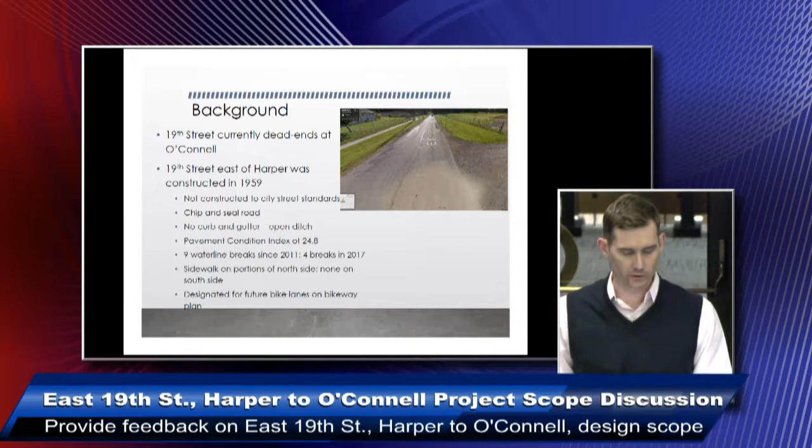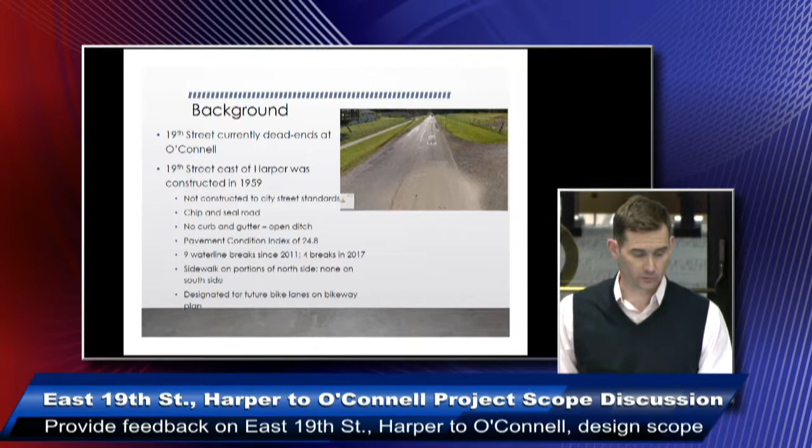Just a little bit about the background of the project. 19th Street between Harper and O'Connell was constructed back in 1959. It was not constructed to city street standards—an old chip seal road. It's in need of reconstruction and improving to city standards. It has a very poor pavement condition index. We've had numerous water line breaks over the years, 4 last year alone, so there's some infrastructure failing out there that we feel needs to be addressed. Some segments have sidewalk along the north side, but none on the south side, so that's something we're looking to improve with this project. It's also on our bikeway plan to have future bike lanes added.

A little bit about the history of the planning and the CIP. We originally began thinking about proceeding with reconstructing the street back in 2014, which ties to the Venture Park project we'll discuss in a minute. Back then we planned on doing design in 2015 and construction in 2016. Since then we've delayed the project and pushed it down the road because it hasn't been as needed as we felt originally, but we're seeing some movement out at Venture Park, and we've now planned this for construction in the CIP for 2019. This was discussed last year when we were putting together the budget and the 5-year CIP plan, and ultimately decided to include it in 2019.

It has a construction cost of about $3.6 million. One thing I'd like to point out early on is we don't have any additional plans to widen 19th Street to the west or do any other projects in the future to increase capacity. The plans are to maintain one lane in each direction for 19th Street.

Jeff's going to talk about Venture Park here in a minute and some of the history of the development.

Back when we were planning Venture Park, we decided that we needed to put in some infrastructure so that it was pad ready for businesses to come in and develop. So we spent $7.5 million out there in 2013 and 2014 doing site grading, putting in streets, water lines, sewer lines.

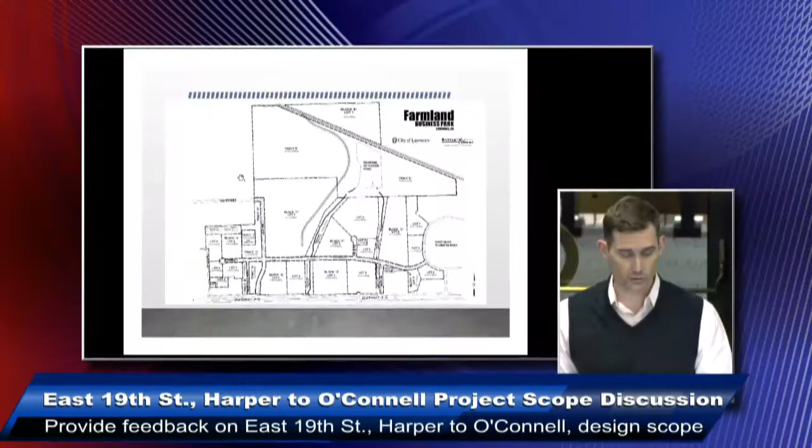The thinking at that time was that we would plan, and this was in 2014 when we finished the project, to redo 19th Street in 2016. At that time, it would be best to make the official connection because the condition of the street was in such poor shape that we felt it would be better to wait until that was improved before the connection was made. So that's a little bit about the history of the infrastructure installed at Venture Park.

One of the things about the planning process for Venture Park was that we looked at providing different access points, and the 19th Street connection would provide safe, efficient access for city residents working out there at Venture Park and at East Hills Business Park as well.

Fast forward to 2018, we finally see some movement going on out there. VanTrust is constructing a spec building with an estimated completion date later this year. We hope that momentum builds and we can bring jobs into the community, which was the original vision of Venture Park.

Another point about the importance of this connection is that it's going to help the marketability of that business park, further enhancing job creation for Lawrence residents as it continues to develop in the future. So when we went through the planning process for the business park, we did a traffic impact study.

It looked at different scenarios at 50% build out and full build out. I'd say it was a pretty conservative estimate. Industrial parks can vary in trip generation, whether it's more warehouse and automated type industrial or more manufacturing that may have more employees and more trips. So there could be some variation, but the trip generation we used was fairly conservative.

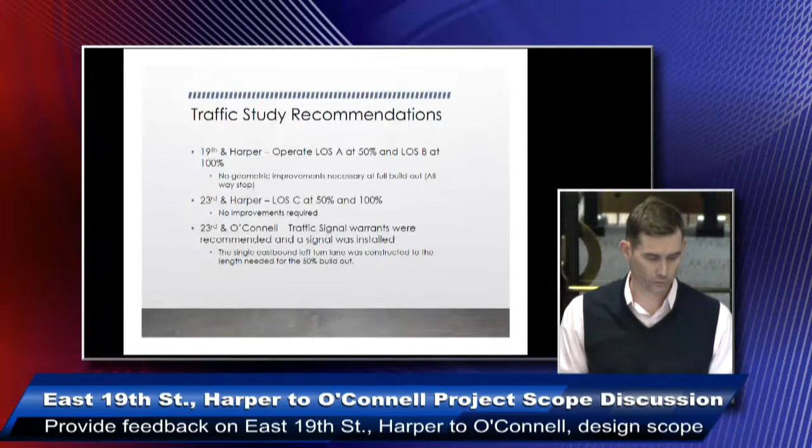And then at 23rd and O'Connell, with the traffic projections, it projected warrants for a traffic signal at that intersection. So when the infrastructure was installed, a traffic signal was installed there, that is really the primary access point to the business park. That was done ahead of time, back when the infrastructure was put in, with that understanding that it would be the primary access point, and turn lanes were put in as well to accommodate that intersection for future traffic.

And now I'm going to turn over to Jeff to go over a little bit of the planning history.

Good evening. Jeff Crick with the City County Planning Office. Just going to go through some of the history that our office has had with this property over its long time here. We actually came to the property all the way back in 2008, before it was even in the city of Lawrence and in the possession of the city of Lawrence itself.

The original Farmland Industries redevelopment plan that was adopted as part of Horizon 2020 was completed in 2008 originally. It was brought into the city of Lawrence via an annexation agreement, and both the county and the city agreed to that agreement in 2009. The city of Lawrence became the owner of the property in 2010, as you can see there.

One of the big things to give you an idea with that one is that in 2008, one of the key infrastructure goals lined out based on the comments we received was to provide a road network through the site that connects to the city's existing road system and connects to East Hills Business Park. So the platting and all the work the city undertook after that was based on the Farmland Industries redevelopment plan and those initial goals approved by the city commission and the county commission.

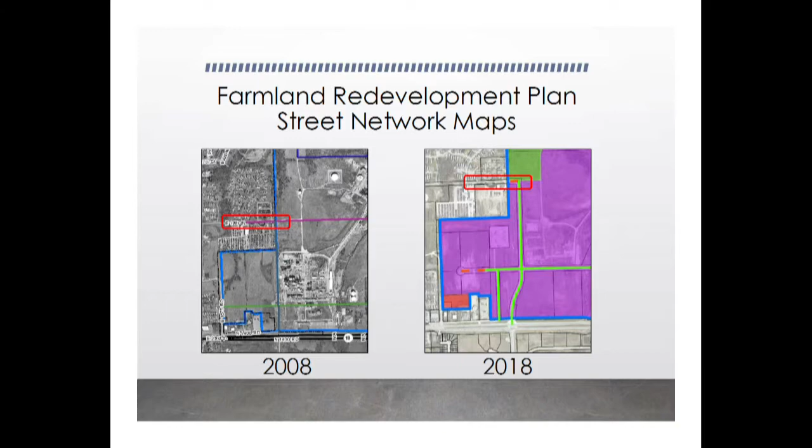But that connection you can see highlighted in the red rectangle is the same connection you can see in 2018 that is highlighted, that follows the plat adopted by the City Commission, showing a connection between O'Connell as it meets up to 19th Street. So just a very brief history on that one.

Plats are required to go before the City Commission in this instance, so the City Commission saw the final plat and accepted the easements and dedications to it, and also the amendment to the comprehensive plan was required to go before the City Commission, and it was also adopted at that time. I'll hand this over to Jessica, but I'd be glad to answer any questions you have in a little while.

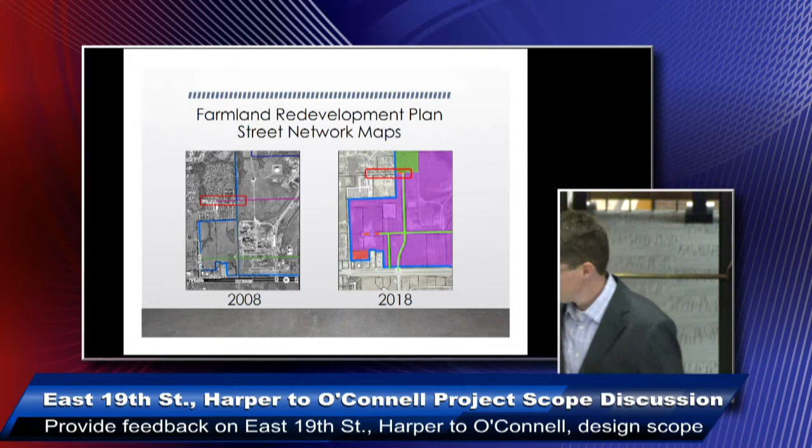One of the responsibilities we have with the Lawrence Douglas County Metropolitan Planning Organization is establishing and adopting regional long-range transportation plans for the region. Looking back at the history of 19th Street connecting to O'Connell or Franklin, it's been in plans for over 20 years to connect as part of our roadway network. I don't have evidence of plans past 2020, but it could exist from before since it was annexed into the city. Over those years it's been identified in plans showing a connection to either O'Connell or even further east to Franklin Road.

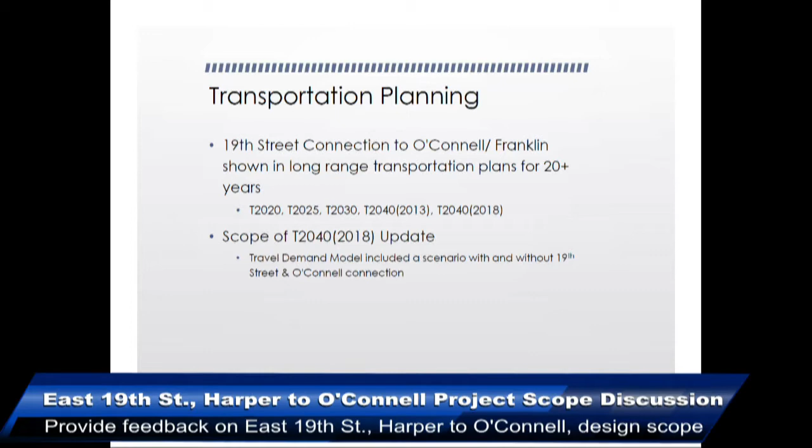During the scope of our last transportation plan update called T2040, we developed a travel demand model for that plan update, and that included a scenario both with and without a connection at 19th Street at O'Connell, based on the comments we heard in the planning process with concerns about traffic from neighborhood and area residents.

So just to give you a little background, we basically establish a travel demand model which makes projections about what existing employment and housing, population look like in the base year in a validated model that loads trips on the network in a form of trip assignment.

We then do that same thing for our out year, which is 20 plus years into the future, so for 2040, where we project based on future population growth with future employment projections. We say if we do no transportation projects, so if we spend no transportation dollars and make no transportation investments, what will the level of service look like on our roadways? That's a volume over capacity ratio.

So what is the volume of the road that it's able to handle based on the existing capacity that roadway has? We found from our base year model to our 2040 no-build model, in all of our 2040 scenarios, that vehicle miles traveled across the entire county—the model is countywide, although you're seeing pictures Lawrence specific, so you can see some detail.

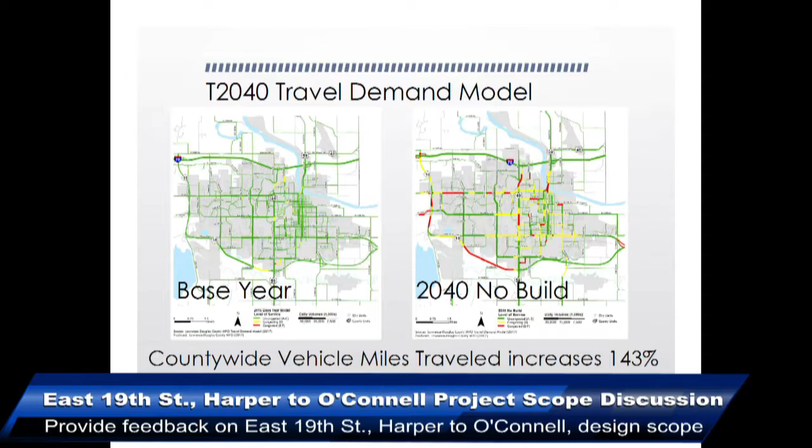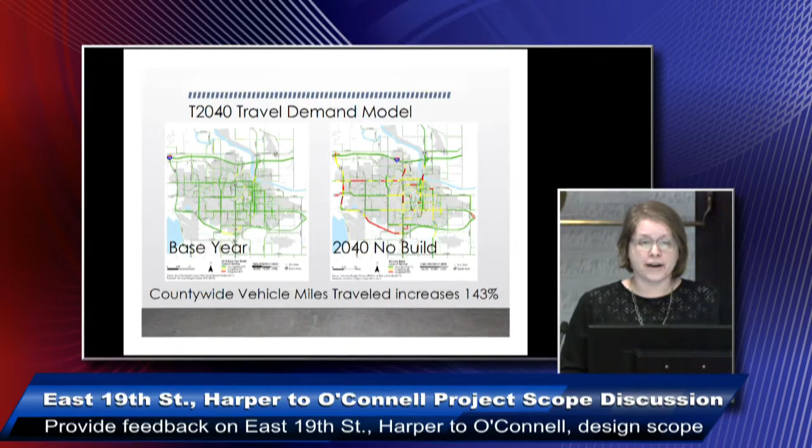That vehicle miles traveled are going to increase is projected at 143%, which means that trip making is going to happen. That trip making and traffic counts across our network is projected to happen in the region, and you can see how that's reflected in the capacity challenges that the model anticipates we could have by 2040 if we don't address those issues.

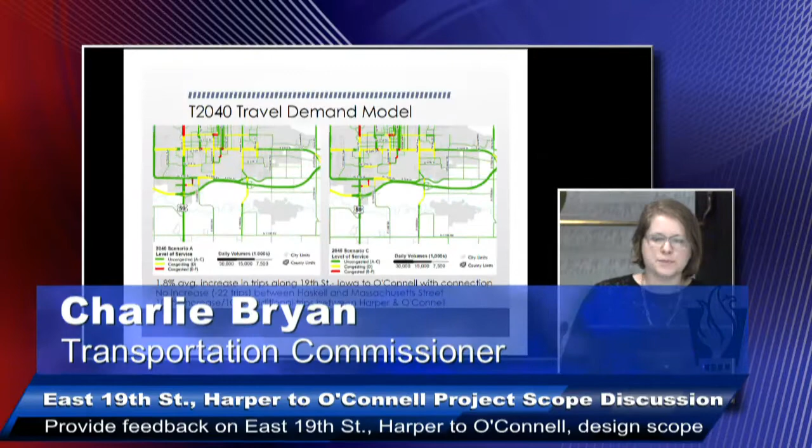Specifically for scenario A, which had a connection to 19th Street, and scenario C, which did not have a connection to 19th Street, we looked at the volumes of trips over that corridor. If you query points from all along the 19th Street corridor, basically from Iowa Street to O'Connell at a connection, the difference between connecting and not connecting the road averages a 1.8% increase in trips along 19th Street from Iowa to O'Connell.

However, there's no increase—that trip count, that trip volume falls off in the sense that there's no correlative increase or change in increase in trips after you get between Haskell and Massachusetts. So once you get past Haskell, there's actually a trip decrease in the segment trips between the connection and no-connecting model. So the model is not showing that trips along the entire corridor are impacted by connecting 19th Street to O'Connell.

However, it does project that there's an 18.1% increase that you see, which is not to exceed an additional 1,000 trips a day for the section between O'Connell and Harper. So that's kind of what the model shows us in the scenarios when we look at long-term planning and regional connectivity in terms of transportation networks.

Out of the T2040 plan, the steering committee recommended, and what's in the approved plan, in terms of the responsiveness to the plan—another thing that Transportation 2040 does is lay out the street network based on functional classification for the entire community. During this plan process, the steering committee recommended, and it was approved, a downgrading classification on the major thoroughfares map from minor arterial to collector for 19th Street from Haskell to O'Connell. That matches the collector level connection that's currently planned on O'Connell from 19th to 31st.

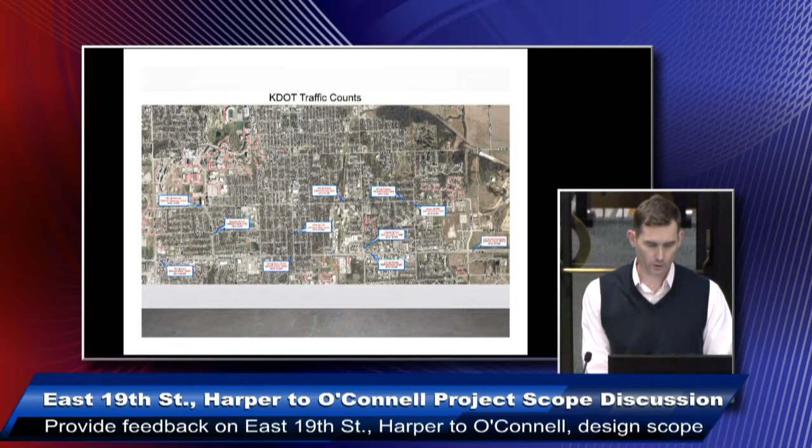So, I guess to conclude, it's staff's recommendation to proceed with the project. It's in the CIP to construct in 2019, so we feel if we're going to follow through with that, we need to get going with design plans here in 2018.

I think the three key points about moving forward with this project is that it's going to improve the infrastructure that's out there now with that street segment that's in failing condition. It supports sustainable transportation options, as we're making a connection of the bike lanes that exist west of Harper on 19th Street and the bike lanes we put in on O'Connell Street.

We're going to also make the sidewalk connection. We've talked about additional ability for transit to access Venture Park with this connection as well.

The main reason is providing transportation opportunities and connection points for Lawrence citizens to make safe, efficient access to different locations in town, but particularly for this project, to the business park at Venture Park in East Hills, so that residents who live in the community can make a safe and efficient trip to get to work or to do business.

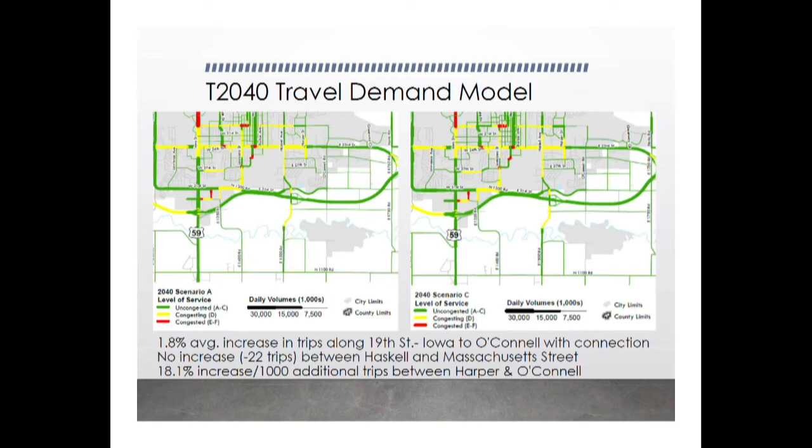The numbers haven't changed though. What you probably heard me say before - we looked at scenario A to scenario C, went into the model and pulled out sections. For example, from Harper to O'Connell, I looked at the traffic volume in scenario A versus scenario C on that segment, and the difference is 950 trips - just under 1,000 trips between Harper and O'Connell when connecting versus not connecting.

So I also pulled Maple to Harper - the difference in trips between scenario A to scenario C falls to 370. That means, while you can't add them together and say that's a total increase in trips, cars are falling off by the time trips are getting to Harper - there's fewer. And if you go between Maple and Haskell, it's down to 150 trips a day. So you can see the trips related to that connection are starting to diminish. By the time you get between Mass and Haskell, it's negative 22 - so there's no difference, actually fewer trips if you connect than if you don't.

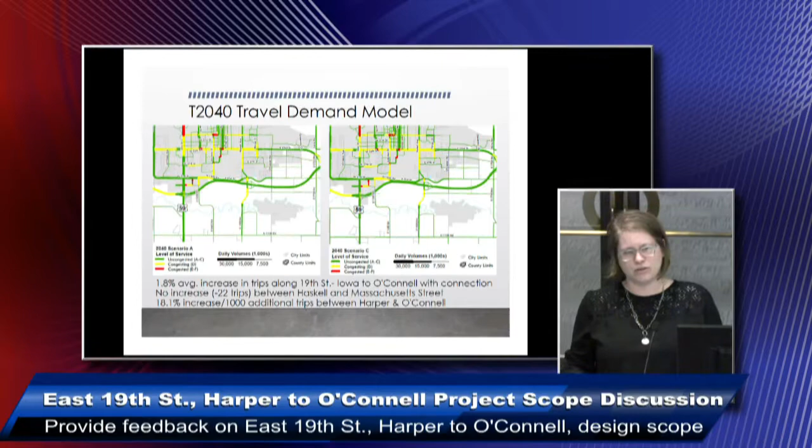So when we look at that and ask what's the significant information, it's that the largest increase in trips is projected between Harper and O'Connell - an 18% difference in the amount of trips between those two scenarios, not between base year and 2040. Once you get between Haskell and Mass, the difference is negative, so there are no attributable trips in the model related to connecting 19th Street to O'Connell.

Does that make sense? Much better this time - it's sinking in a little bit, but that was very good. I don't know if this is a fair question either, because I know these models are pretty complicated, but the factors that you put in the computer to generate that number - what are those?

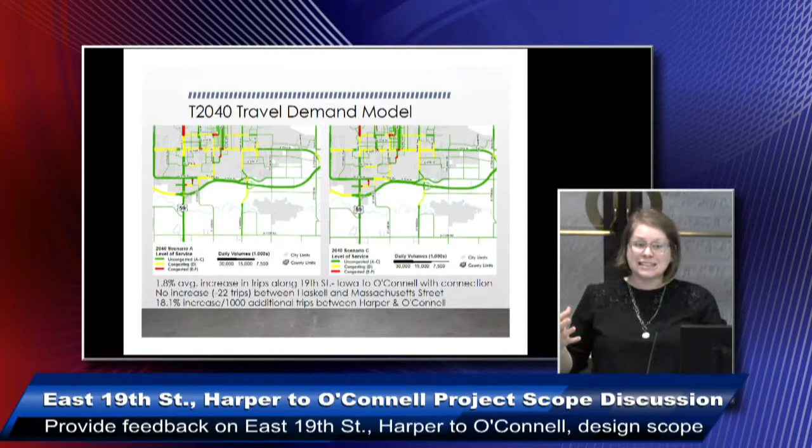They're all assumptions based on our best idea of the plans that we've made. For example, we build a street network and classify all the streets based on what classification they are. We tell the model the number of lanes it has, so through lanes. We show the model what's built - not every street is built in the model, not all streets show up, because we're doing countywide, so we're looking high level at the major connections of at least collector and above streets, in terms of how that's going to function for our transportation demand.

Then we say, where is all the population going to be? And we build traffic analysis zones that link back to that network - it's like a geographical area that links to the network. Then we make base year assumptions about population and employment, retail and non-retail, because there are different trip generation factors based on the type of employment and retail or non-retail that's there.

And then the model does trip assignment, which accounts for how people are going to move based on the network and these origins and destinations. Then there's something called travel delay, which the model calibrates based on speed, the link segment, and the level of congestion of all the other cars on the roadway. It uses a relationship called a volume delay function to route trips, so once a trip is going to see too much delay, it routes it to another street.

So for example, if you build a typical collector street that was built 50 years ago versus something built today, which under city policy allows traffic calming, those wouldn't necessarily get assigned trips the same way. Based on the number of lanes and the classification of that street, it attributes trip delay differently. So once the trip becomes less attractive to take based on the level of service in the model, it routes people different ways.

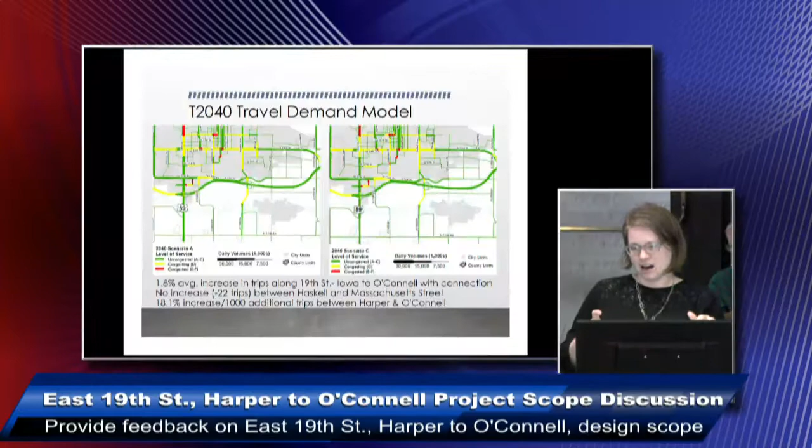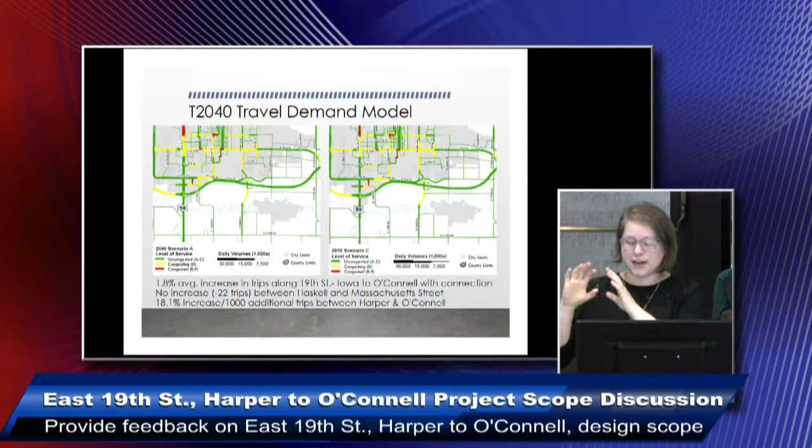Okay, so that's not the number of trips on that segment. What that represents is the difference in trips between connecting and not connecting. Regardless, that land use has trip generation happening because there's residential, industrial, or commercial properties there. So the difference in trips between connecting and not connecting is an increase of 18.1%, which is about 1,000 trips. That's not the volume that's projected.

So what is the volume that's projected? For example, from Harper to O'Connell in scenario A, it's about 6,300. It's about 5,300 on scenario C. So that's about 18% of the total trips, which is 1,000.

So the current number of trips, the no-build scenario assumes that there's no access, right? Correct, but the uses are still there. We might still project higher intensity residential, or more commercial or industrial, a different use that still generates trips.

So what is the current trip count? Is it close to that no-build scenario? There's no count from east of Harper, so I can't tell you what the current count is. The closest we have in the base year, it's estimated at about 5,000. Today it's probably under that. Maple to Harper was, in '13, 5,100, and in '17, 3,800.

Okay, but that's the closest segment we have to look at. Thanks.

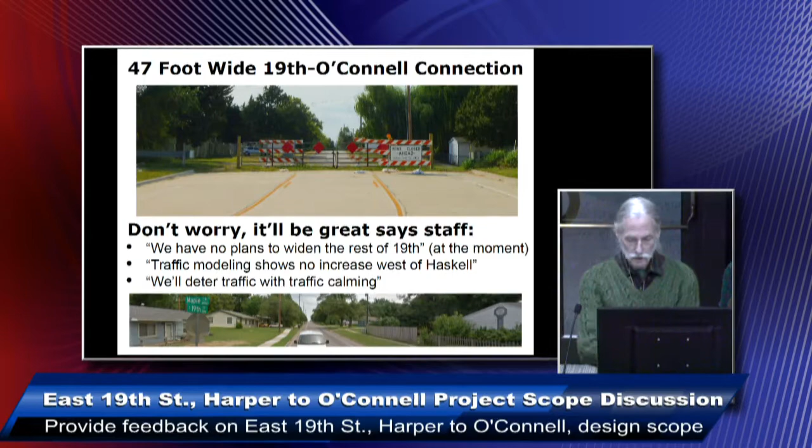On the other side of the picture, staff says, oh don't worry, it's going to be great. Quote, we have no plans to widen the rest of 19th Street, at the moment. Quote, traffic modeling shows no increase west of Haskell, I think maybe it's actually 3%, something like that, and will deter traffic with traffic calming. Why build a huge street and then try to deter traffic? These are what we're being told. Well, which is it, is it going to be more traffic or not? They can't have it both ways.

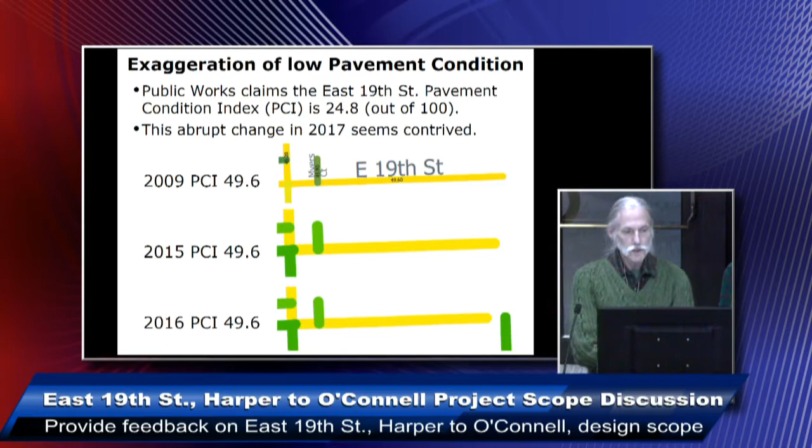This is what they say, they have to rebuild the street because the PCI is so low. It's been consistently 49.6 since 2009, until last year it plummeted. Why? It's sound. It does need some patches, like that little area in the foreground.

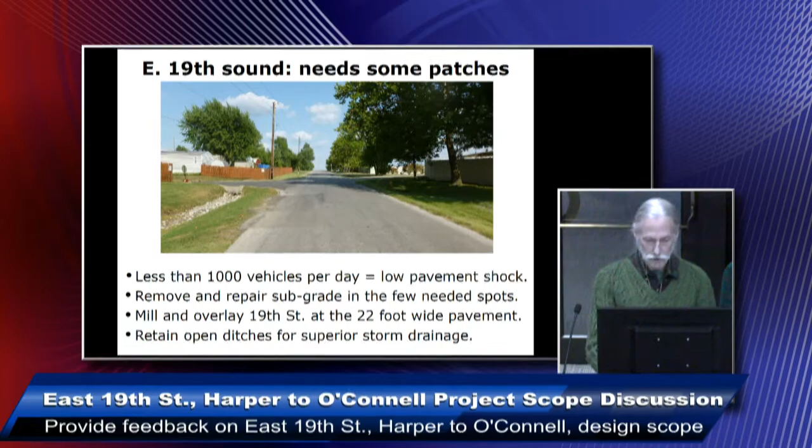They can remove the subgrade and patch it, then mill and overlay it. We want to retain the open ditches for superior stormwater drainage. The same process was done on Haskell last year, which had much worse deterioration. They removed and repaired the subgrade, then milled and overlaid.

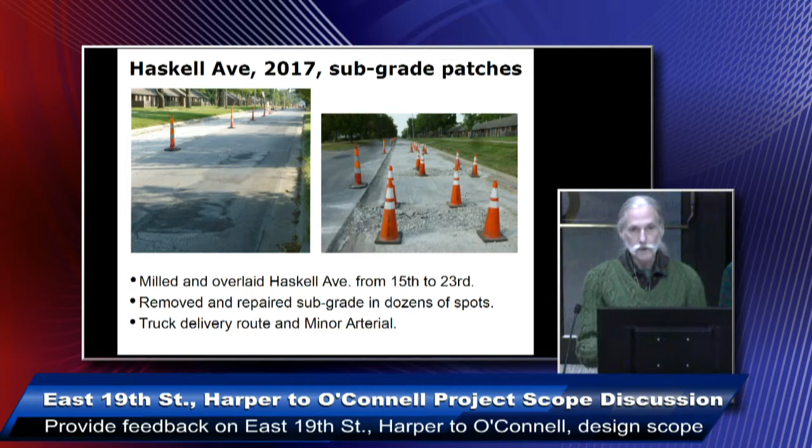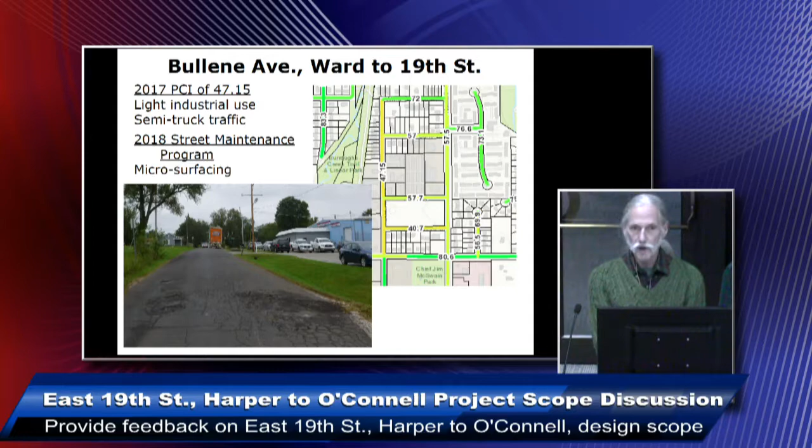This is a truck route. Certainly that's doable on 19th Street. Same with Bullene Avenue. This street is in even worse shape, but it has a PCI of 47. Can't believe it. And yet they're not even going to mill and overlay it. They're going to spray paint it. It's called micro-surfacing. This is inconsistent.

Delete the CIP project. Include a mill and overlay in the comprehensive street maintenance program this year as its own project. The street can be repaved. We'd love to have water line upgrades—they're done routinely without rebuilding any street in town. Sidewalks, shared use paths, we welcome that. And there's a historical memorandum of understanding to retain those stormwater ditches.

So that's basically what we're saying. We think it meets all the criteria and goals that Public Works has been repeating year after year, and it meets the goal of protecting our neighborhoods as well. So that's all I needed to offer you this evening, and I appreciate your time.

Good evening. My name is Pat Cady, and I live in the Barker neighborhood.

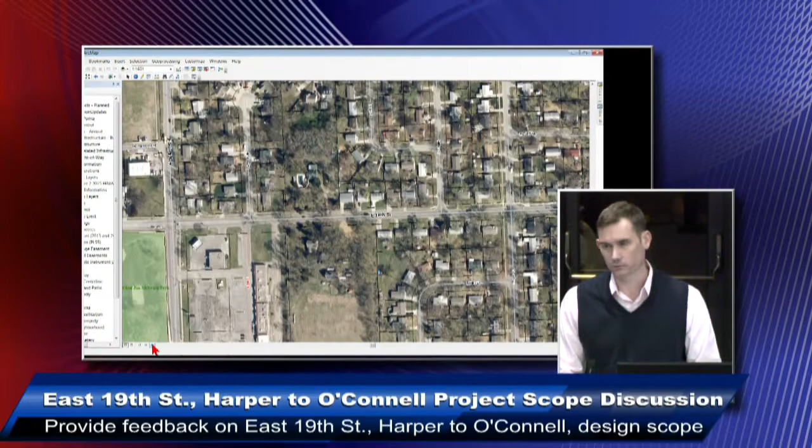You're from Haskell all the way to O'Connell. Correct, it could be considered for traffic calming. I think on the slide I said Harper, but I meant O'Connell. So, is there a reason you stop at Haskell?

I think at this time that would be my recommendation based off the traffic projections, and that it would be better to wait and see if it was needed west of Haskell in the future. I would hate to put a bunch of traffic calming in now, not have that additional traffic, and cause traffic to use other routes. I think it would be better to wait and get traffic counts after the project's done, to see if we could always go back and add traffic calming on streets.

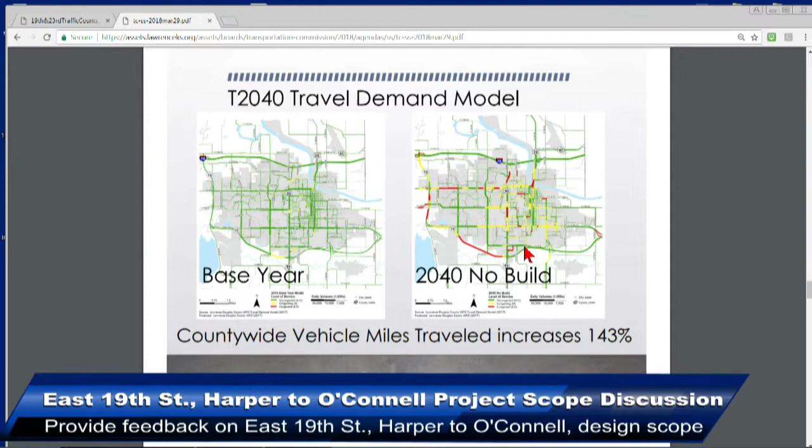Sure, and I'm not really debating the network design. I'm talking about whether your intention is to try to keep fewer cars there. The implication in those two pictures is that red is something we want to avoid. Maybe it's counterintuitive, but if the neighborhood is overwhelmed with traffic because we've made it so easy, because we're trying to keep everything green, it may be a bad policy.

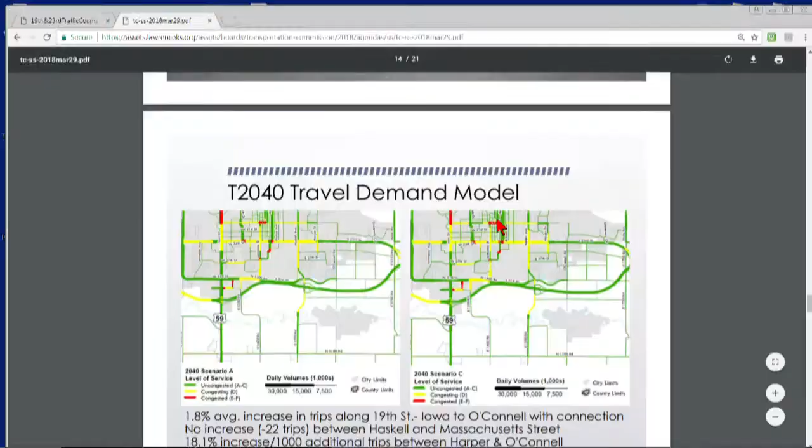Yeah, but if you look at the scenario map—go to the next slide—look at 19th Street. It's the same in the color scheme in terms of capacity, whether you open it or not. Right, maybe it should be red. So if your goal is to try to reduce the volume there, you could make that red and the rest of it stays green, and that seems like you might have achieved the goal.

But those roads already have excess capacity in the neighborhood—you're only looking at yellow level of service for the most part on the roads where you're saying increased traffic. You want them red for increased traffic, but don't do projects.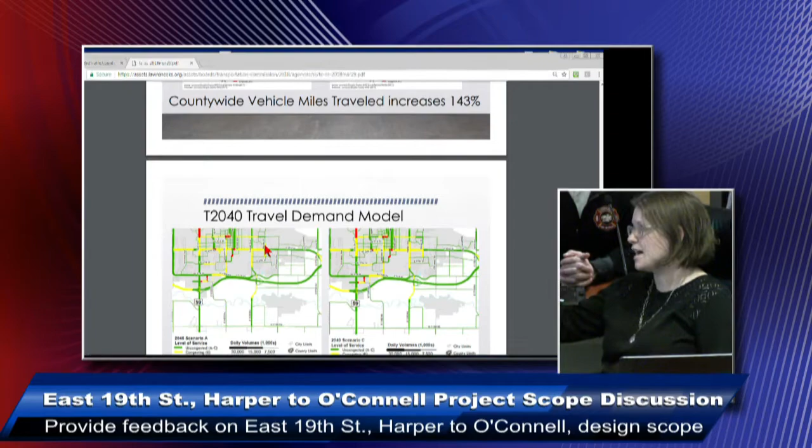Well, I mean, that's not your goal either. I think what you're trying to say is there needs to be something in addition to this that considers how the street functions and what people's experience is with it, besides delay. But I don't know how you do that in this modeling process.

I guess it feels like there's a lot missing from the analysis, and you naturally, intuitively think it should all be green because that must be the right thing. I'm not sure that is the right thing.

We're not going to make it all green. Scenario A is our region in 2040 with the projects we plan to do. There's no way you can make the entire network green. The idea is not to build capacity everywhere, but to make it function more efficiently, address hotspots causing safety or economic problems, and at the same time recognize that the plan calls for looking at how you can take trips out of single occupant cars to make transit, bike, and ped more attractive, although our model is not a mode choice model.

Can I say something about the whole complete streets thing? I wasn't sure I wanted to bring this up tonight because I was actually pushed out of the bike lane on 15th Street today by a car. I'm not sure if it was intentional, but the bike lanes in this town are pretty narrow and frightening. You have to go as fast as you can to get to the trail as quickly as possible. But I was driving down 19th Street a couple weeks ago and took some photographs because it wasn't busy.

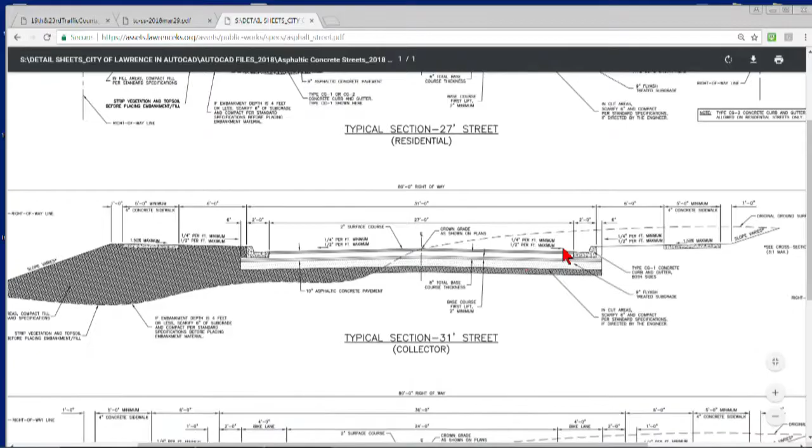It's hard to see, look behind the chart, it might be a little easier. This shows 4-foot bike lanes after the gutter, which with the gutter is 5.5. So it's 4, and then it's 2 12-foot lanes. That's the 36-foot. So the 31 is just—the bike lanes go away, basically, and you have wider travel lanes to account for parking.

Well, Amanda, I think, as I've taken a look at Ninth Street, which you pointed us to, I want to point out that it looks to me like Ninth Street has a volume of traffic that's probably exceeding what your projections show for 19th Street. You said it's about 9,000? I think it was 7,000 something.

Well, that was 2010 numbers. I'm on the updated interactive map, and it shows about 9,000. Yeah, it might have gone up—I was on our local one, it only had up to 2010.

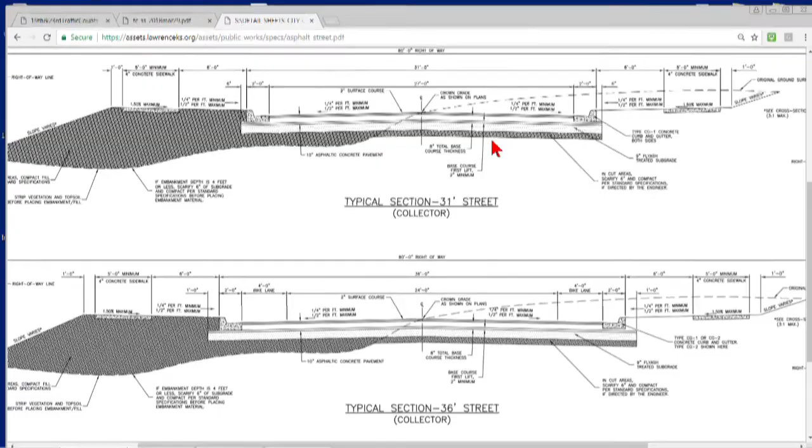The volume on 19th, kind of near Harper, is 3,840 in 2017. And at the worst scenario, if I'm understanding the way you guys were looking at the traffic impact, that would double to maybe somewhere between 7,000 and 8,000 total. So at that point, it would be a collector street that has less volume than Ninth Street. Is that, am I understanding that correctly? Yeah, based on the assumptions.

So the question I had about—are we doing something to this neighborhood that's suddenly like a significant change to something? It seems like it would really make it more like Sunset Hill. So that would be the equivalent experience of a neighborhood.

The difference there is the road is only 22 feet wide. It's not either 47 feet or 36 feet, it's a 22-foot wide road. There's no bike lane. Where at? 9th Street. Wouldn't it be 26? It would be the minimum residential street, so 27 foot back to back. I don't know if we have any that are 22.

I'm doing kind of my high-level Google Maps measurement. It says it's 22 feet. I understand. So I guess what I'm getting to is we have a street in our community that is already narrower than the minimum, and it has a volume of traffic that's 3 times what's currently happening on 19th Street, if I'm understanding that correctly. That's possible, if that's the volume.

So there's getting to this—how do we better understand the context of what we're thinking the neighborhood might experience? It's like they're going to turn themselves into Sunset Hill, but they're going to have a 47-foot roadway. And how does that impact their sense of livability?